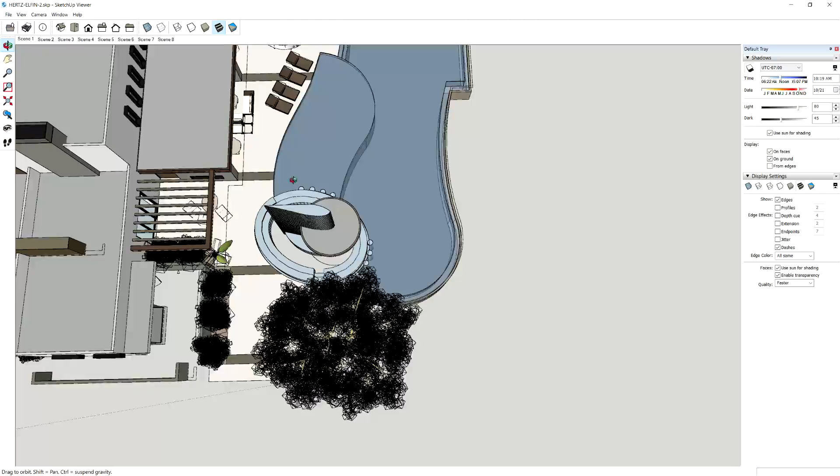I've done a lot of work on this, and so I'm checking in with you just to make sure I'm on the right track. This is the SketchUp model that you sent over, and I wanted to try and capture some of this without going too crazy on it.

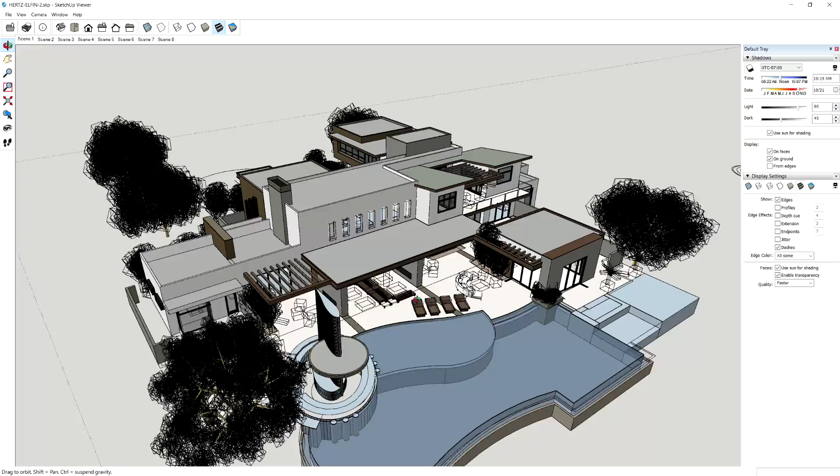Things that are expensive in this is all the steel. He's using steel beams to hold this thing all up. I wouldn't do that. You could do something similar, but do it out of wood and stucco.

He's got double fireplaces here. I don't think I'd do that. I think I'd stick your barbecue and stuff over here.

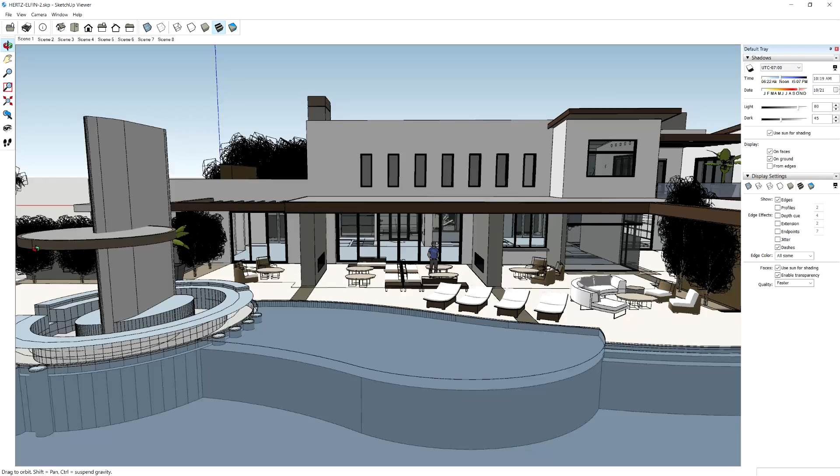I don't know if you want to do the Las Vegas thing here. I don't even know how I would construct that. I mean, I could do this, but to get this in here and spend a whole lot of money for something, I'd put a pop-up over it. You could put some kind of structure over it if you wanted to, or don't even do that. Just make that the jacuzzi or something.

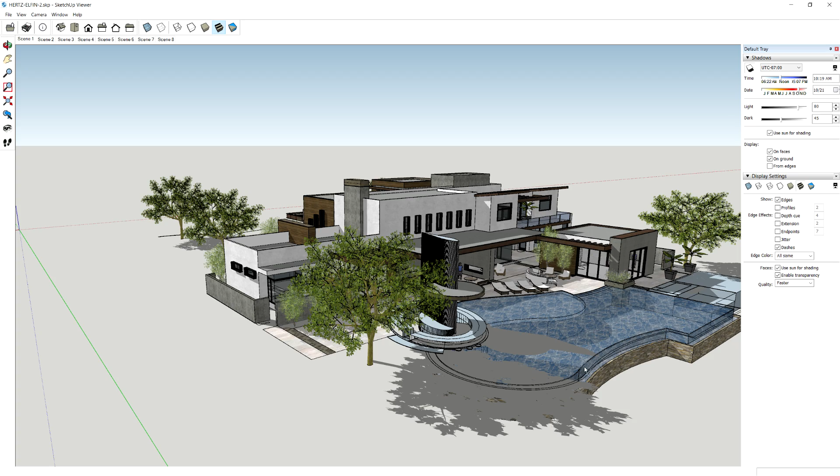I don't know, anyway, trying to get some of this flavor. One thing I did do was look at the pool, and the way he's got it, it looks like he wants to do a disappearing edge, or vanishing edge, over that, and that could be expensive. All of that being vanishing edge.

So I came up with a couple of ideas similar. The other thing I did, get rid of this. If I can get rid of this, there we go. I looked where he had this on the property, I had this pulled forward, so I messed with the whole thing and pushed it down to where you could hang this a little bit over the edge. Not going too crazy with it, but you could do a similar pool.

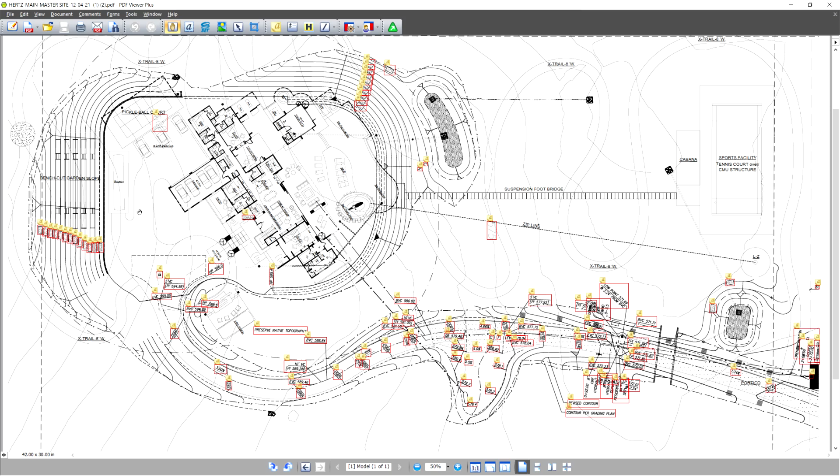But I pushed all this down, the whole house, pushed it down, set it on the lot to where you've got more room up front up here if you want to use it. So I made all the changes that we talked about.

Bedrooms, 13.6 by 11, 13.6 by 11, so we can get the queen and the single or a double in there. Both have baths, both have walk-in closets. This works out pretty good.

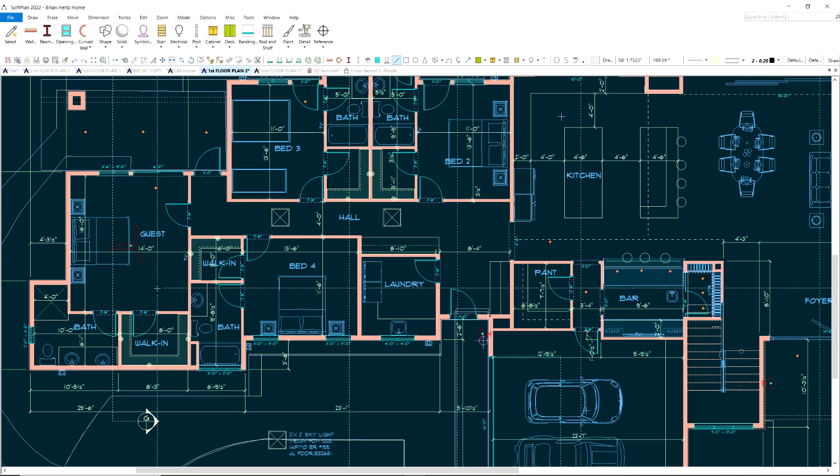Show you that in a minute. We made this bigger. That works. And everything else is pretty much the same.

I worked on a big pivot door here, glass. Talked to my engineer, and we could come around the corner with it. But I just don't think you're getting much value for the dollar here, bang for the buck, especially underneath there. You don't see it. So I did a couple other things I'll show you.

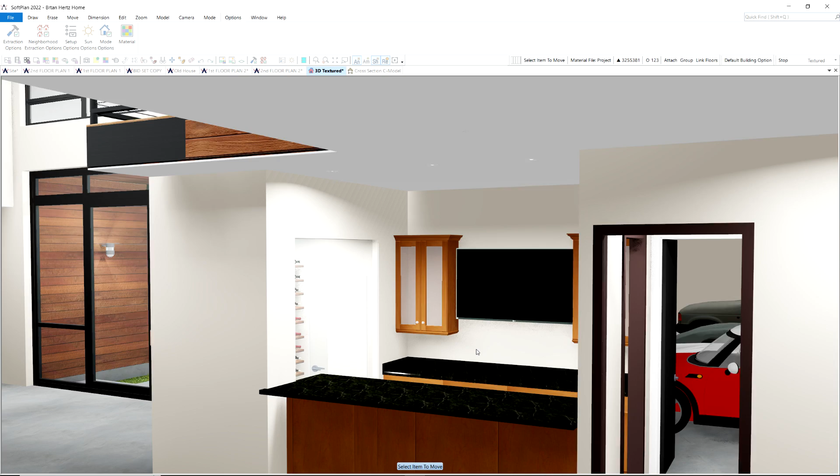Let's go. Oh, here's that wine bar area. It's kind of what I had in mind for it. I don't know what color cabinets you want to do, or the countertops or stuff. And I haven't done this anywhere else. I just wanted to show you that.

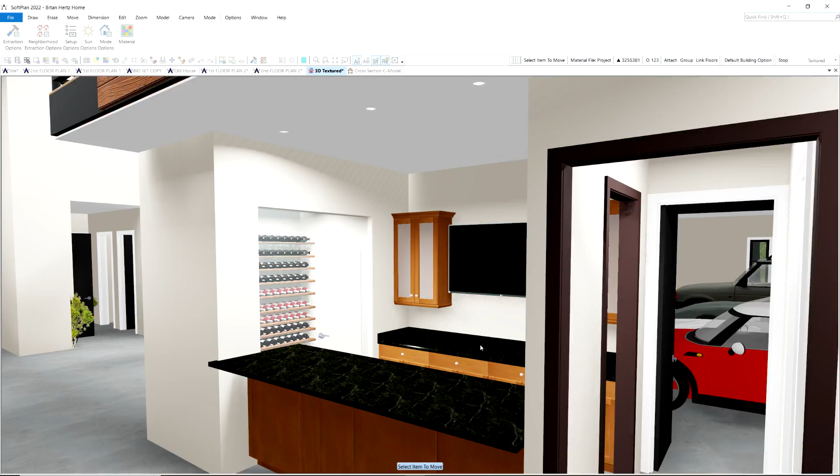Something like that is what I was thinking. And then your stairs, I wouldn't use the smaller planks. My program won't let me put in the big planks for the stairs there, but I can give you that look that you're looking for without spending the money, you know.

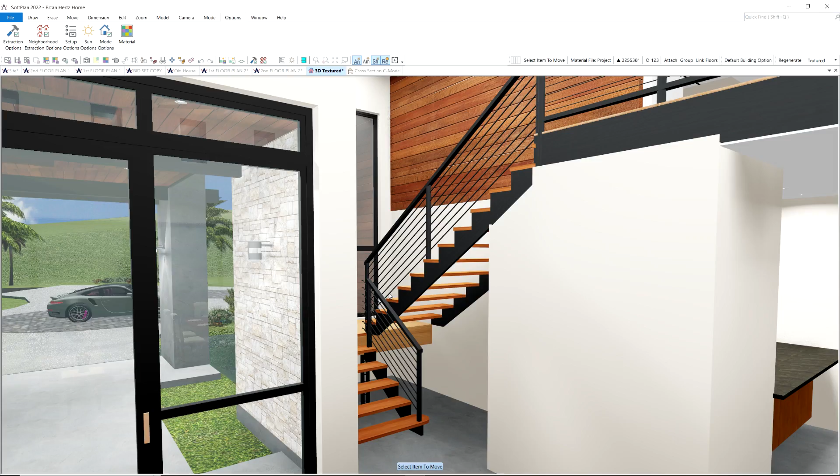Here, let's come out here. Got rid of those divided windows up in here and just put in more of that industrial look. Gave you the storefront industrial look there for the entry.

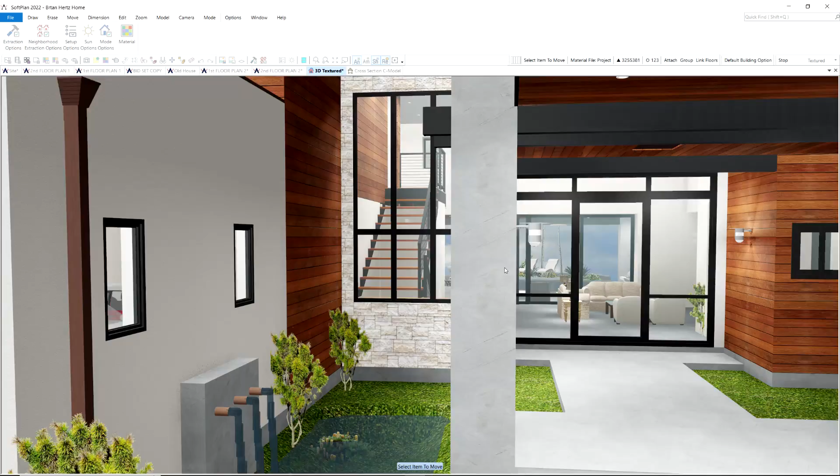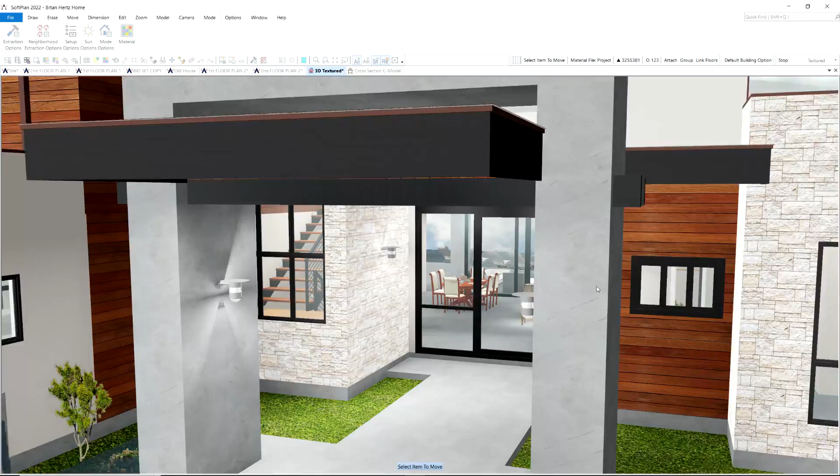I can make that work without spending a whole lot of money. And this window here is just framing that. Where you really get the effect, you get a peekaboo of it here, but inside, which like I said, I haven't done very much on the inside yet, that's where it starts looking pretty cool.

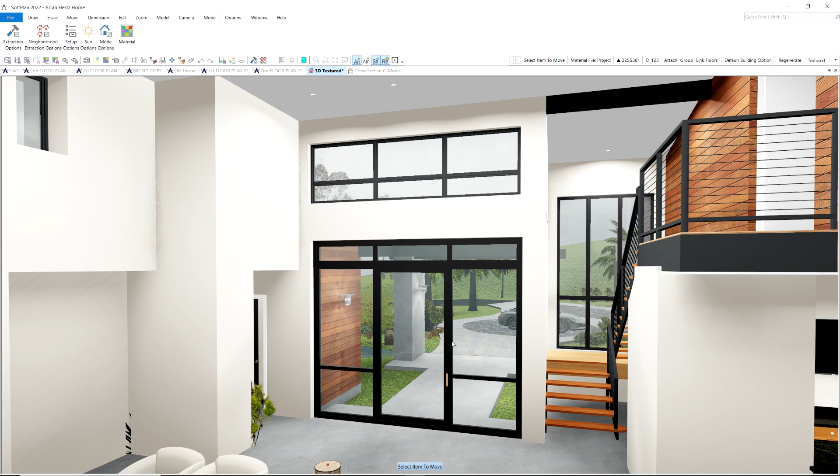The other thing we got to be careful with is you don't want to use too much glass, even if we have to use dual pane glass these days. You got to make this thing heat efficient. California laws, if it's not energy efficient, it won't fly. So got to be careful putting too much glass in there. I don't think we're in trouble yet.

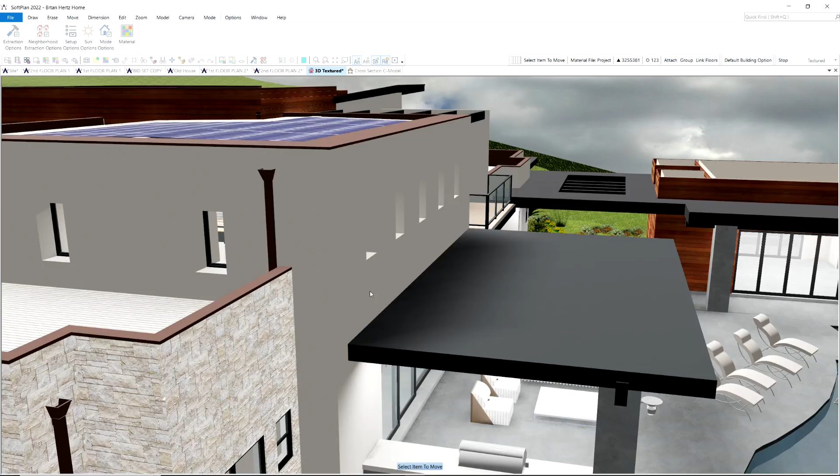You also have to have solar, so figuring out where to put solar. In the back I added some stuff, but I wanted to go back to the floor plan and get an overall general plan, a master plan.

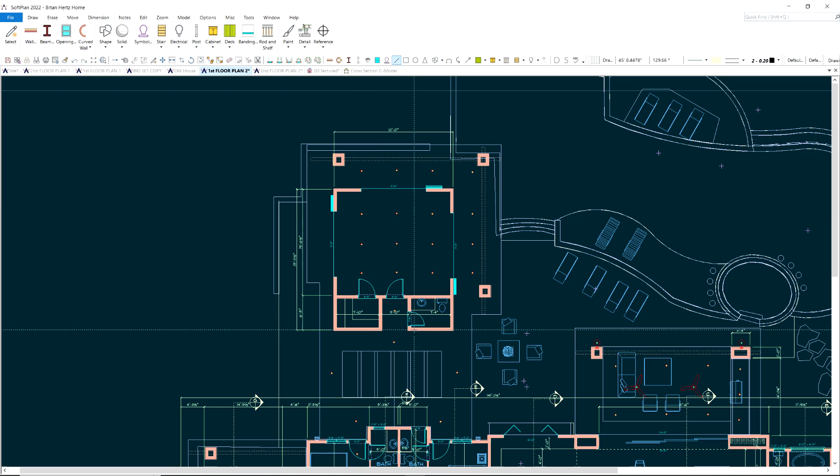So I sketched in a yoga room here, pretty much what he did, not quite as big. Let me look at that - how big was it? Yeah, it's not quite as big, I don't think. I sketched it in just so I'd see how it laid out on the property, on the lot. Here, let's put it in here.

So that's how it's sitting now on the property. Like I said, I had this pulled pretty far back before, so I pushed it this way, pushed it to the north and to the east a little bit. And the pool, which I'll show you in a minute, will fit right over that.

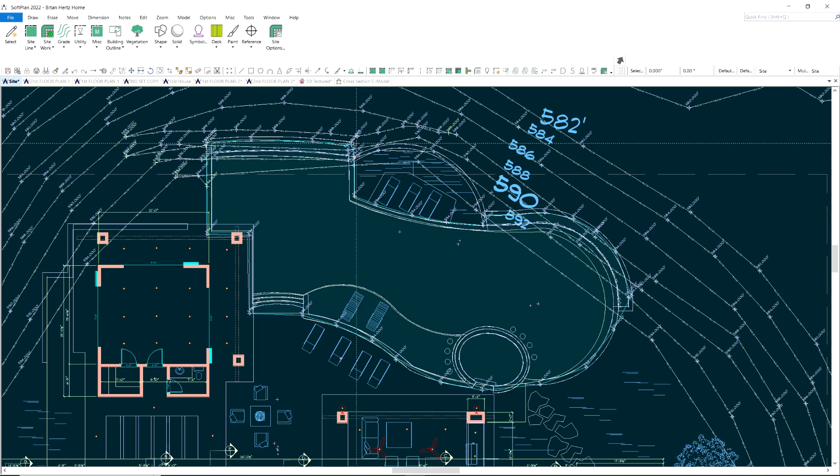What I did with the pool, I pretty much kept the same thing that you had, but I put an island out here. I'll show you what that looks like - instead of doing all the grading and having that waterfall edge, that vanishing edge along here, I did it here and I did it here, and then I put an island in there. I'll show you what that looks like.

Added outdoor spaces here, future outdoor space with this future yoga room, so that can just attach right onto this house without too much damage when you decide to build this.

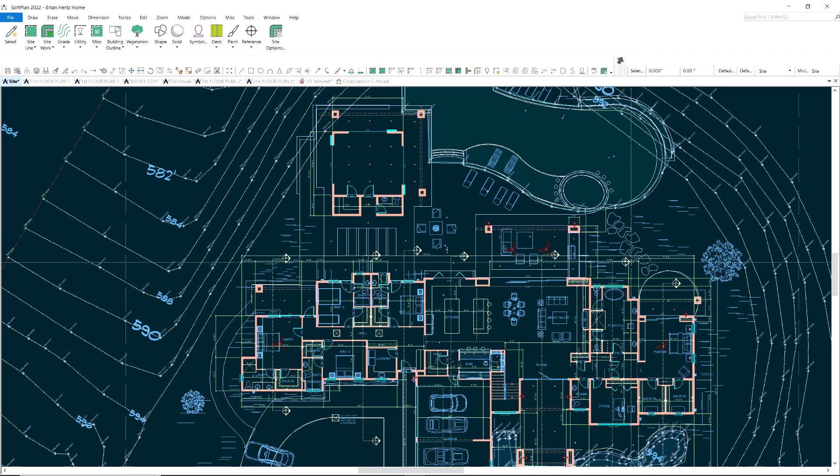My dog, she wants me to take her out.

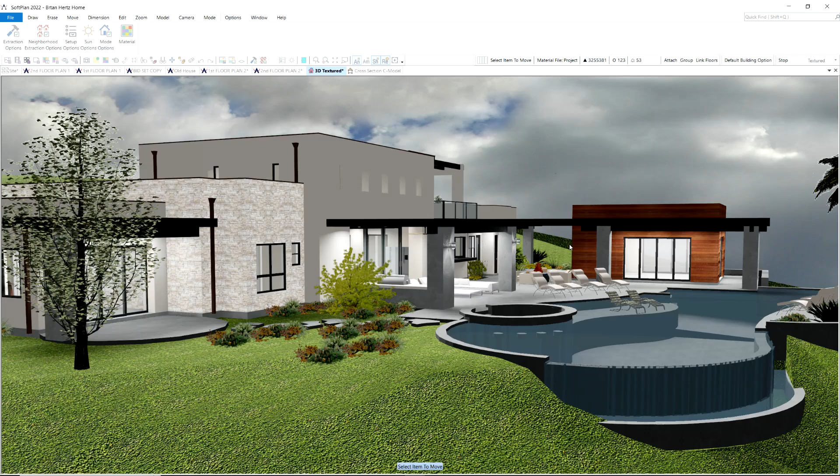So what does that look like here? I got to give you the full effect. Let's see, right there we go. It's looking pretty nice.

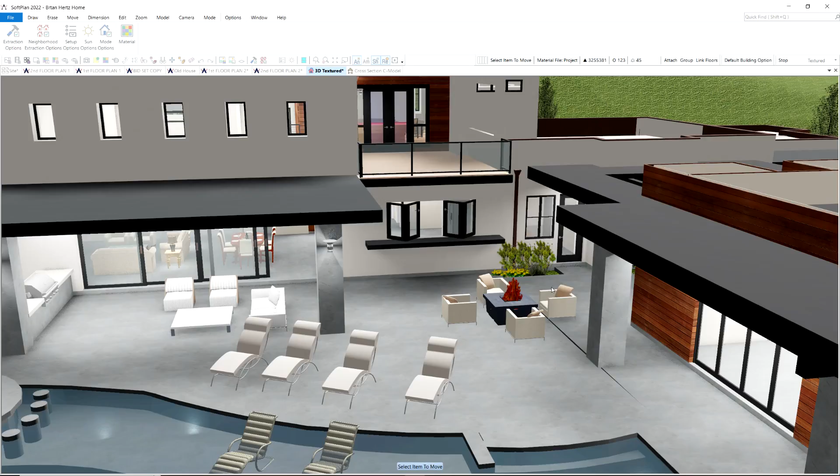So this is the barbecue area - barbecue, sink, put a refrigerator out there. This is ending right here, this cover. Leaves this open, put the fire pit out here. Fire pit can pull over a little bit more this way.

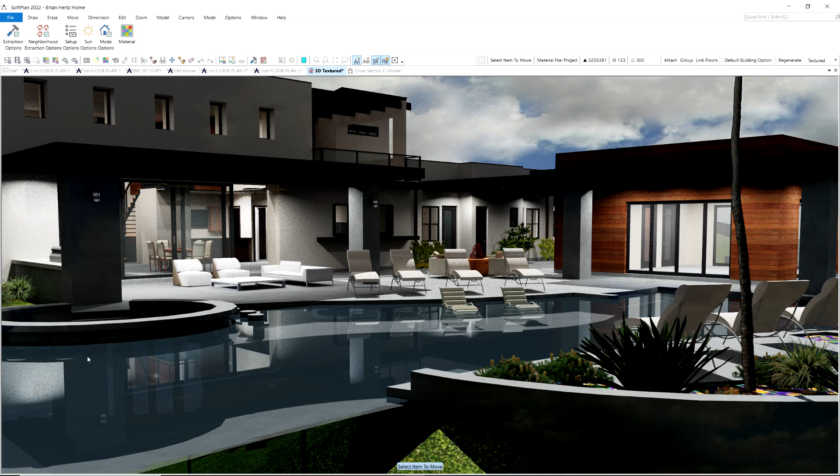Got the same, pretty much the same idea with the beach, Baja Beach, and the seating around the bar, and there's underwater seating there under the bar. Yoga room looks nice, fits good there.

You've got room if you want to do the spas over here. We can do that.

It's my dog. She starts whining about this time of night. She wants to go out and play.

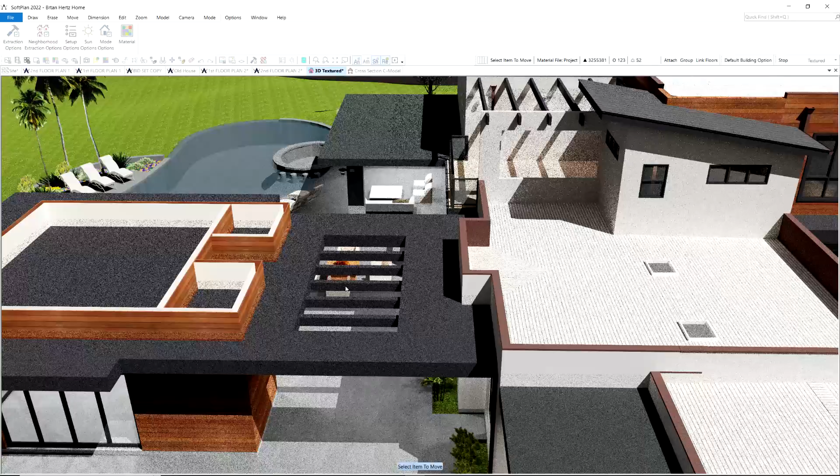Anyway, so you get a lot of the stuff that he was doing, just not quite the same scale that he was doing. Really looks good.

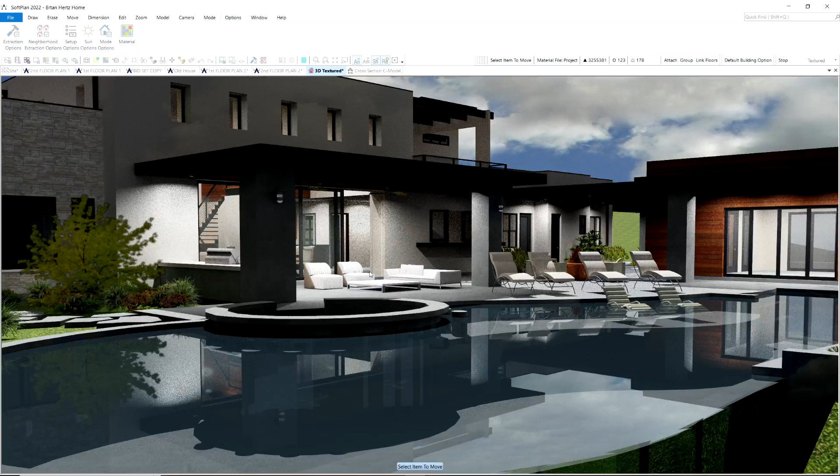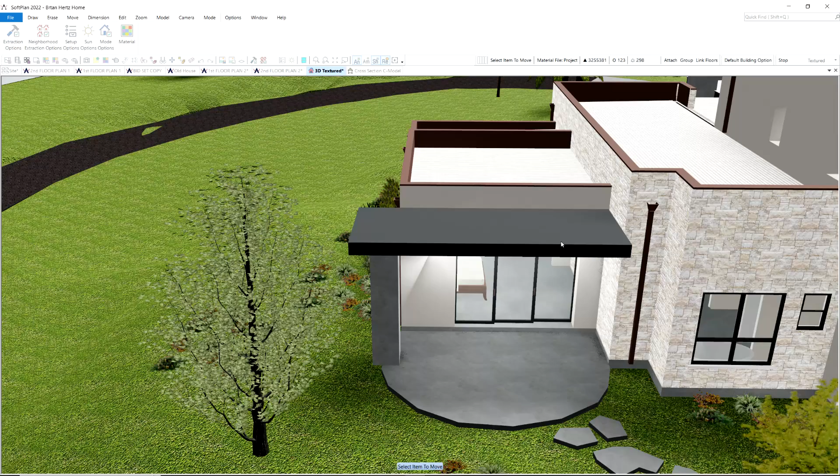Covers over here, and I've done them with a little bit, well, I would call it a standard construction way. Run a beam across here instead of trying to hide the beam inside there. What he was doing is really doing the structure on the outside, a steel beam here and a steel beam here and a steel beam here, and then hang that whole thing in between the beams. Very expensive way to do it. So running a glulam beam across here.

Same kind of thing going on around the gym, yoga room. So let me know what you think.

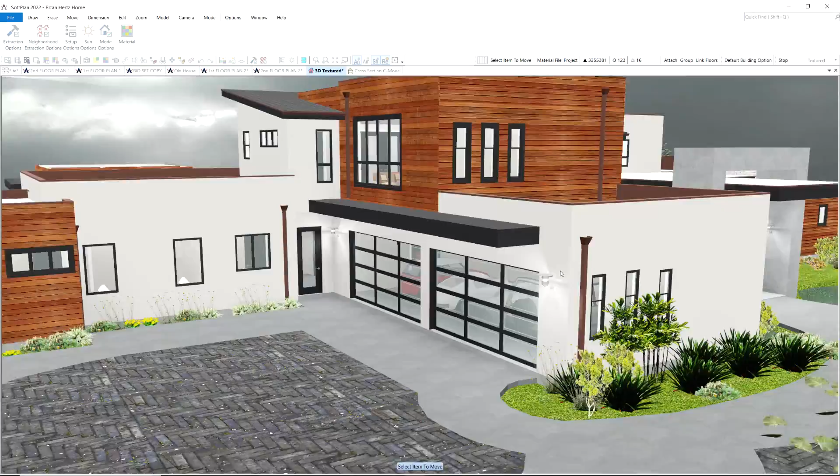I tried getting some butt joint glass, a corner window that wrapped around this, and yeah, I didn't like the way it looked. I think it's trying too hard there. I think it looks better framed like that.

You drive up there, it looks like that's all glass, especially when that's broken up, coming up the driveway here.

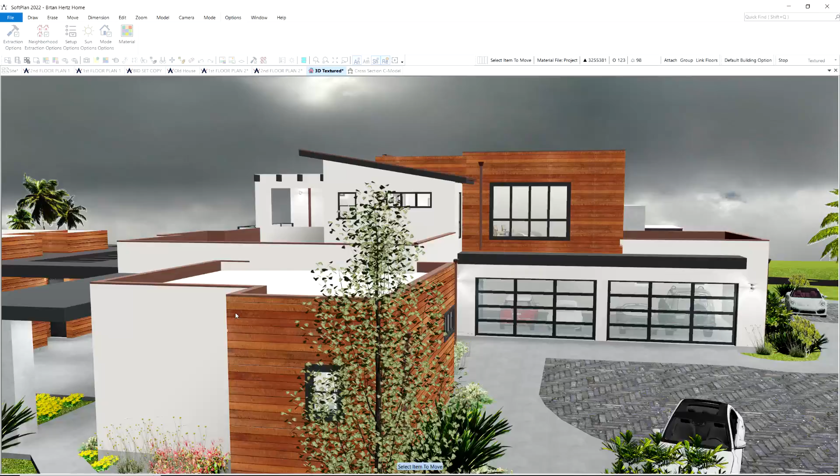Did we get it down to, without this, did we get it down to 1,500,000, 2,500,000? I don't know, I don't know. I know it's less, and the construction itself isn't as complicated, so that should be less.